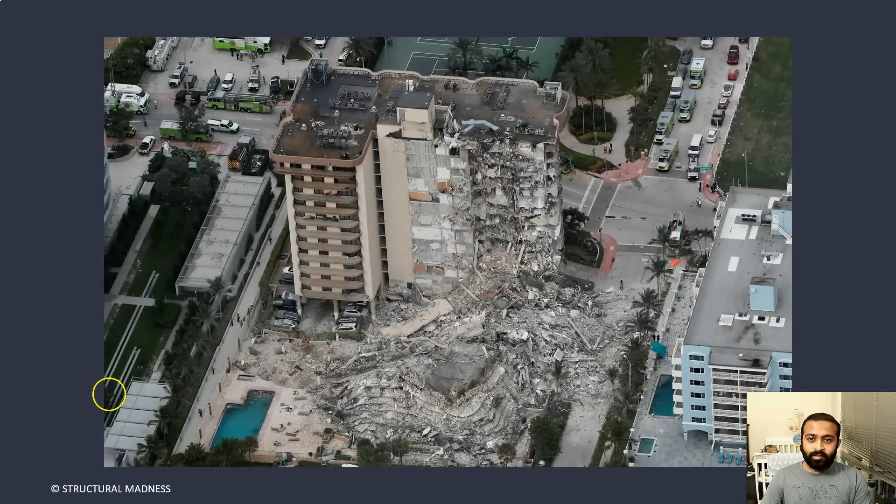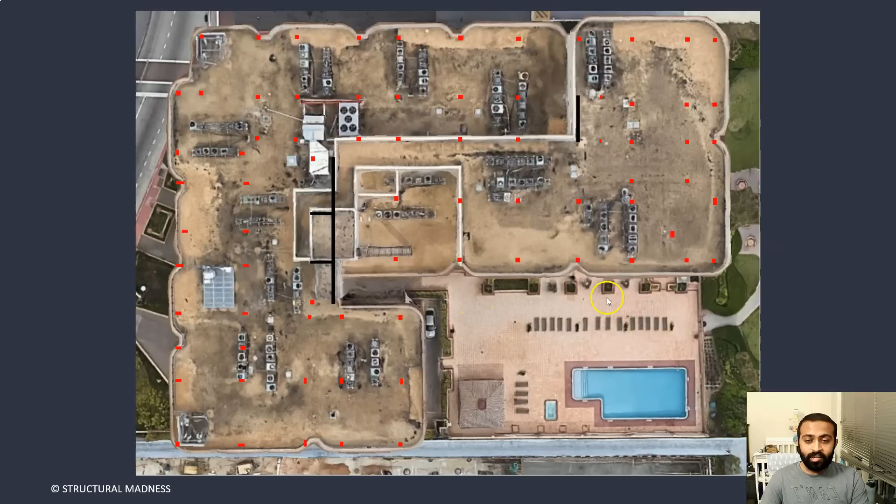The 12 stories of the building just pancaked on top of each other within a matter of 12 seconds. What we are going to look at today is some of the models of the pool deck that actually gave away first, and the overall layout and locations of the columns present in the building, and how it contributed to the global collapse of this particular structure.

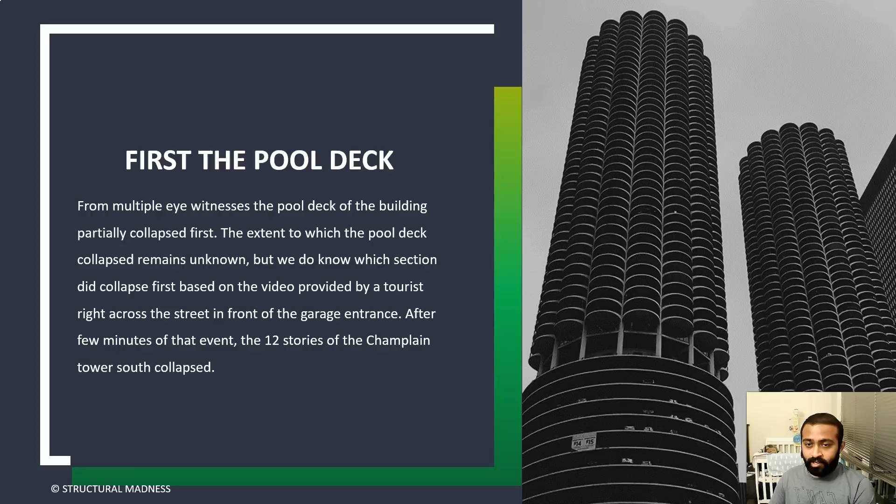From multiple sources, the testimonies of the survivors, as well as people who captured videos across the street of this building, it was quite evident that it was the pool deck that gave away first, and soon after, within a few minutes, the entire 12 stories of the Champlain Towers collapsed.

This is one snippet of the widely circulated video that shows the garage and what was happening at that particular instance in the building. This shows that there was debris behind certain columns in the garage, and there was water flowing and flooding the garage as well.

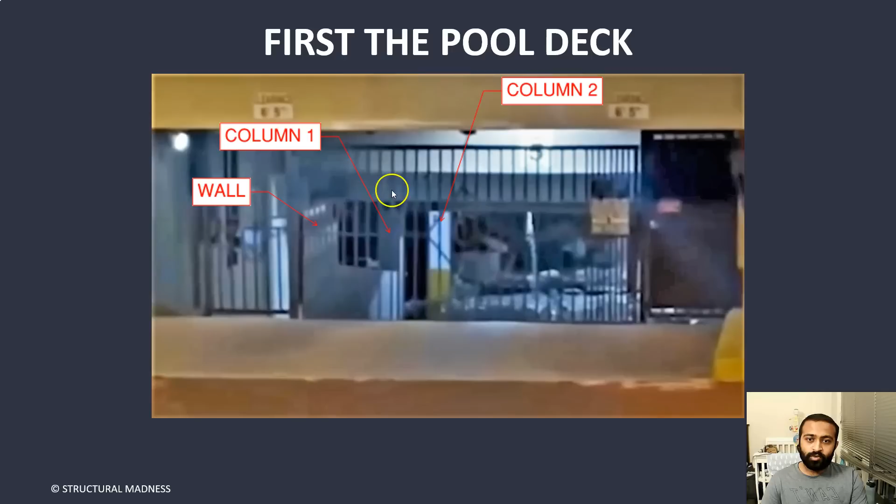What I've identified here are three structural elements that we can see at the moment. This is one of the structural walls, the northeast corner shear wall. There is one column right next to it, about 15 to 20 feet away, and then another column about another 20 feet away.

To get a better perspective on where the person was present while shooting this video, she was right in front of the parking garage entrance. If you understand this camera angle, you can see this is what was marked as the wall in the previous footage, and this is column 1 and column 2. These two columns are standing, so there was no collapse up until this location.

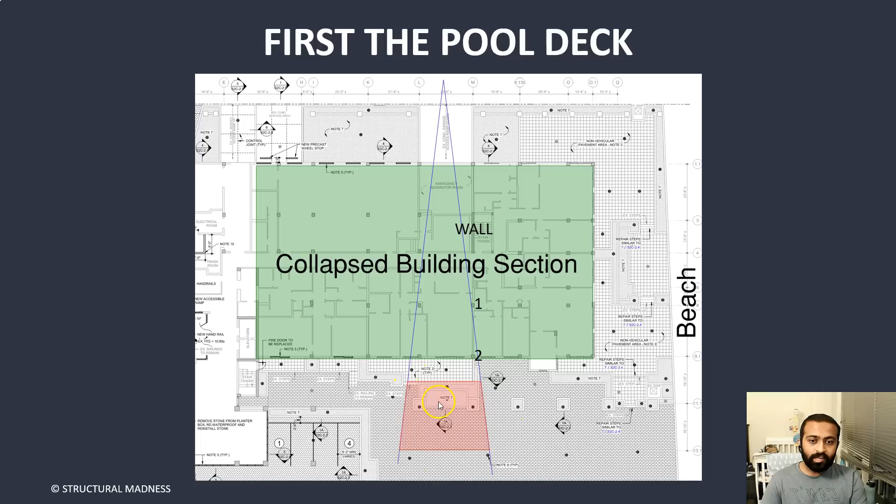This is the actual shadow of the tower above. So it is quite evident that when this particular video was shot, there was potentially no collapse along this column line, but all the debris we are seeing is actually present from beyond that particular column. That tells me something was going on here which led to the collapse of this particular zone of the pool deck slab.

So that caught my interest. Now what we'll first understand is once the pool deck collapsed, after a few minutes, how did the tower collapse?

You all have seen this video. The front face of the tower first gave away, followed by the back facade of the tower, and then after 5 to 7 seconds, the northeast portion of the tower collapsed. So what do we understand from this?

It is quite evident that first there was a local failure based on survivors' descriptions. It was like the pool deck gave away first, then after that the entire structure gave away. So why did the pool deck give away?

Based on my initial observations of the pictures as well as the structural drawings, and looking at Morabito's consultant report back in 2018, it was quite evident that there was lots of corrosion, which leads to loss of structural strength of the system. There was lack of drainage as well because there was nothing like a slope to drain that prevents water puddling. And then there was significant concrete damage because as soon as the rebars rust, it actually tries and spalls the concrete off because the rebar tries to expand as it's oxidized. On top of it, there are some changes in chemical properties of the concrete as well.

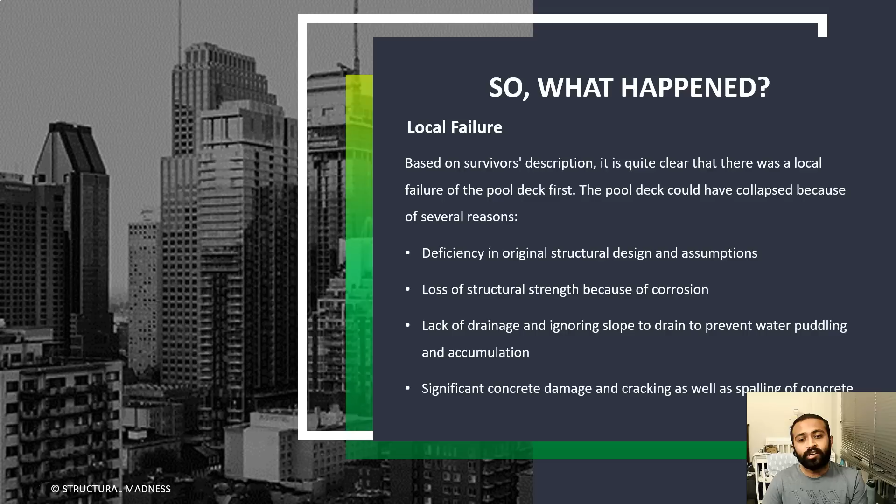And as soon as concrete cracks, it becomes weaker and weaker, right? On top of it, what I also noticed is there were a few locations on this pool deck where there was just an inherent deficiency in the original structural design and the assumptions thereof.

So these were the factors that I think did contribute. The factors that did not contribute were: it's not like the pool deck columns failed. The columns did have plenty of capacity. There was no evidence of seepage of seawater into the basement, and there was no significant differential settlement between the columns. This aspect of differential settlement is reported by Morabito Consultants in its unverified field survey report. So it doesn't seem like that had any role to play in this.

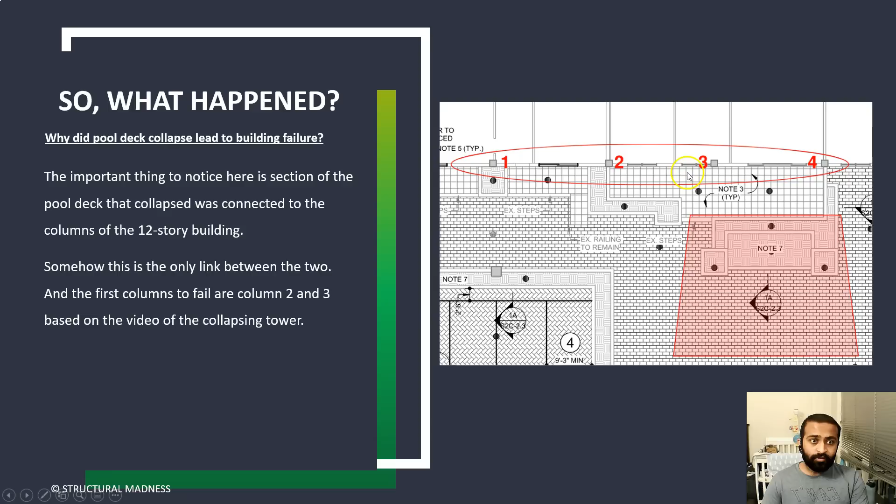So let's first look at what happened. Why did the collapse of the pool deck lead to the building failure? The only common key between the collapse of the pool deck and the building failure are the columns circled over here, columns 1, 2, 3, and 4. These were the common elements between the collapsed portion of the pool deck right there, as well as the columns that were supporting the tower. Apart from this, I couldn't find any link that was relating the two.

Why did our pool deck collapse? So this is where we will start answering all the whys, like why did this happen? Why did the pool deck give away in the middle of the night? As discussed previously, there were a few reasons why the pool deck collapsed.

One of the major reasons is definitely the rebar corrosion. And then there was also significant cracking. So as soon as I see significant cracking just under serviceable stages, that means your day-to-day building loads, which is like your floor slabs' weight itself without any additional load on it. For example, there's no one on the deck.

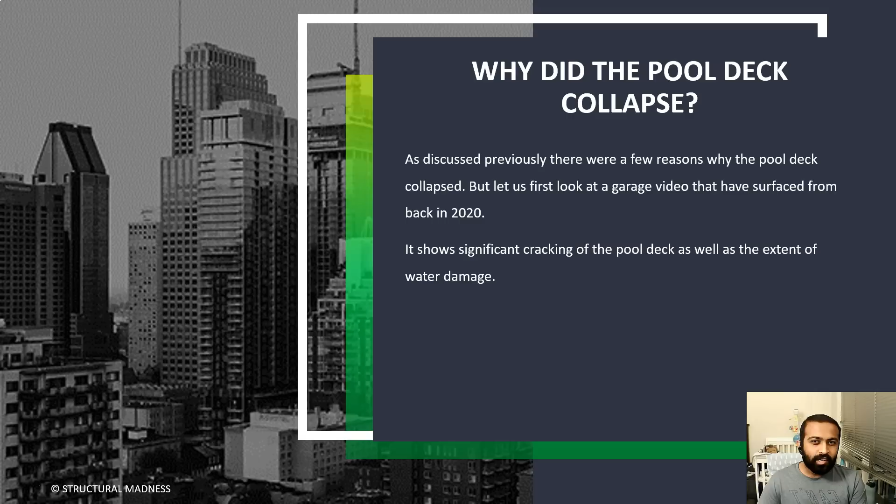There are no people, there is no car, there's nothing on the deck. It's just the deck that's supporting its own weight, along with the tiling and everything that's present, and the mechanical plumbing present underside of the slab. Just under those conditions, if a structural engineer sees significant cracking, then we start to question: was there enough rebar to begin with in this particular slab design or not?

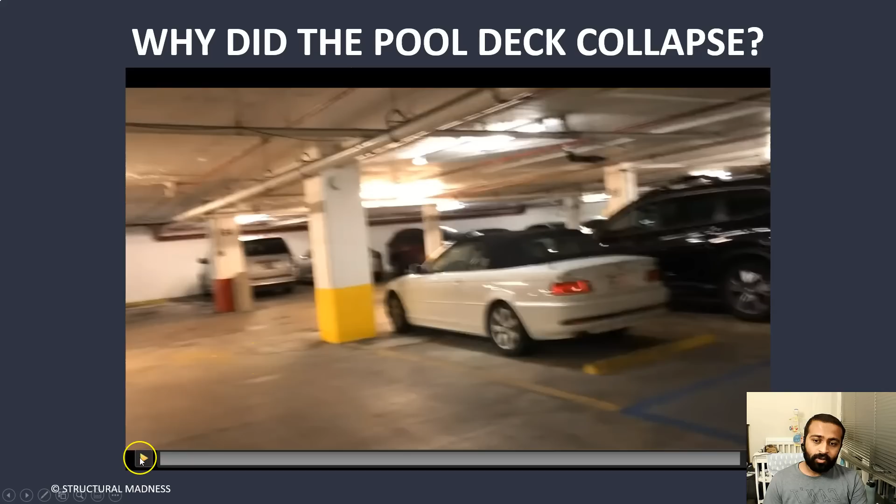And that's what I wanted to figure out. To get to that point, I first looked at one of the videos of the garage that was shot in July 2020 - that was like a year prior to today. You can see that the ceiling of this particular pool deck is actually showing lots and lots of signs of cracking and water damage.

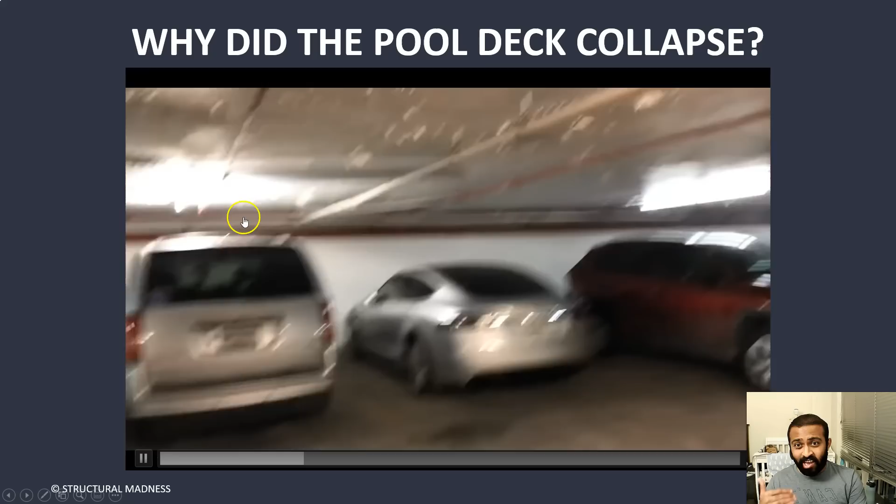Water was seeping literally everywhere underside of this deck. And when you see this kind of action happening in a building, you know there were two major issues. One was that there were no drains to kind of drain out the water that was accumulating on the floor above. Secondly, having that water seeping through your slab and spilling underside of the slab onto the basement floor below tells me that the concrete cracks were kind of significant, allowing the water to seep through its cross section and drop down into the slab below.

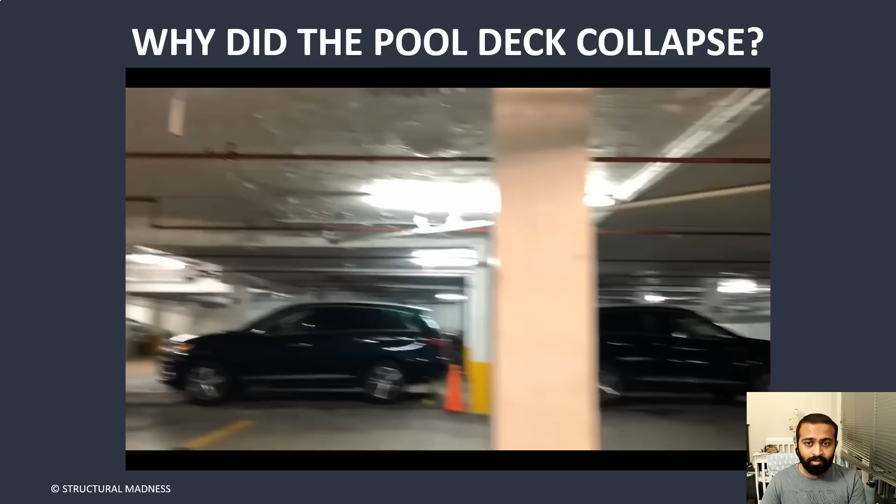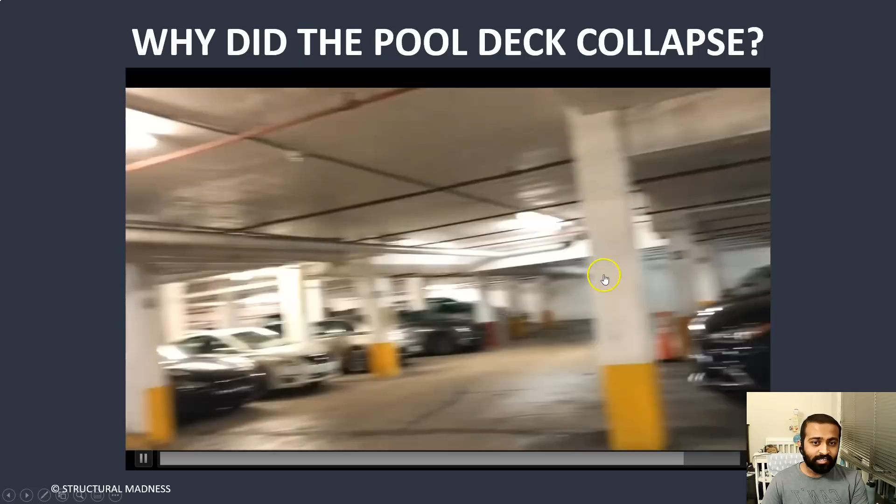And this is the portion that's most interesting for me, because it's right in front of this particular garage entrance - it's our second column right there. If I just go back a bit, that's our second column right there that was just visible in the video.

And beyond this column, everything was kind of just rubble. So we know something happened right there. What I'm showing over here is shot-by-shot footage of the person's perspective and where they were in terms of the entire building footprint, like the basement footprint.

As you can see, when you're looking in this direction, you're looking towards parking stall number 52 and 54. This is the perspective of the person, this is the camera angle. And then the person goes, circles around, and moves into this direction. I've just cut some clips in between because I didn't find them overly useful at the moment.

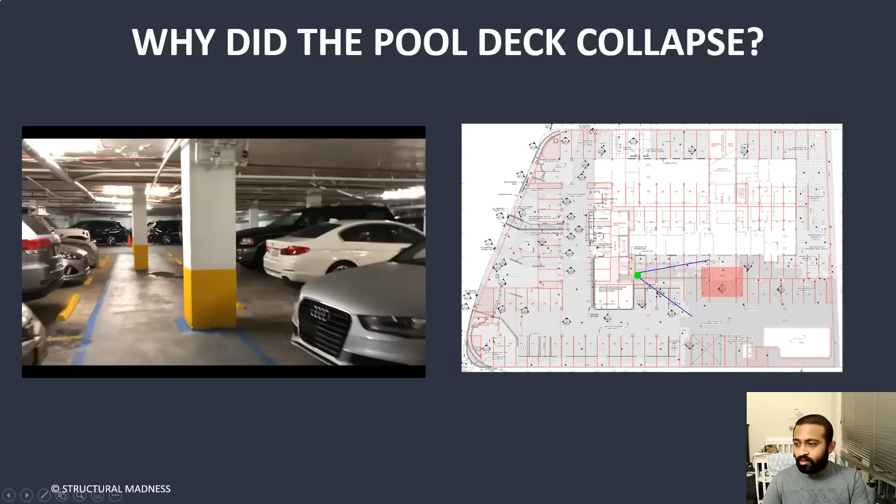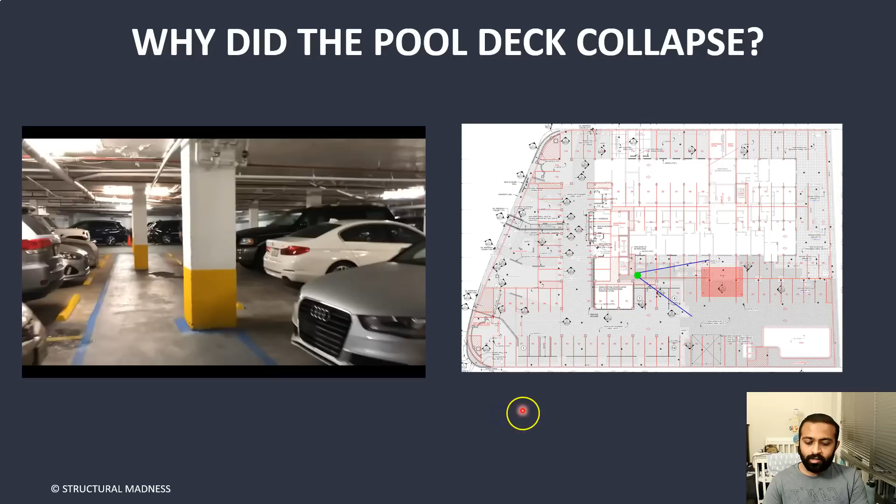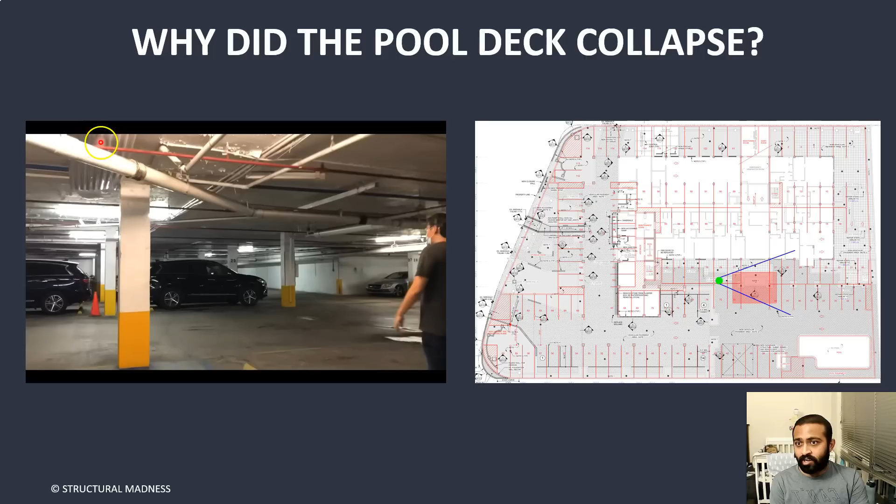But in these clips as well, you can see that there is some sort of water damage in this region. And if we move forward to the next slide, you see that there are some plastic corrugated sheets which are trying to divert the water from the cars below, meaning they were trying to reduce or eliminate the damage that the cars will face when the salty water falls on it. So that's why they provided this corrugated plastic sheets.

And this is what's very interesting. This is our column number 2 that we initially marked on the plan, which actually survived. This particular portion collapsed in the garage video that was shot by the person right across the street. What's interesting is this entire portion has been damaged by a lot of water seepage, while this portion is perfectly fine. You can see how smooth this is, but this is all damaged.

And what's surprising is right above this section, there is a planter wall, and you have soil fill and grass or trees or whatever they were growing at that time. That's all there. You know that typically these soils are saturated, and if the soil is saturated, it will have water in it. When the slab has some sort of minor or significant cracking, that water is going to seep through the slab, and you'll see its effects on the ceiling of the floor below. Correct? So keep this particular portion in mind.

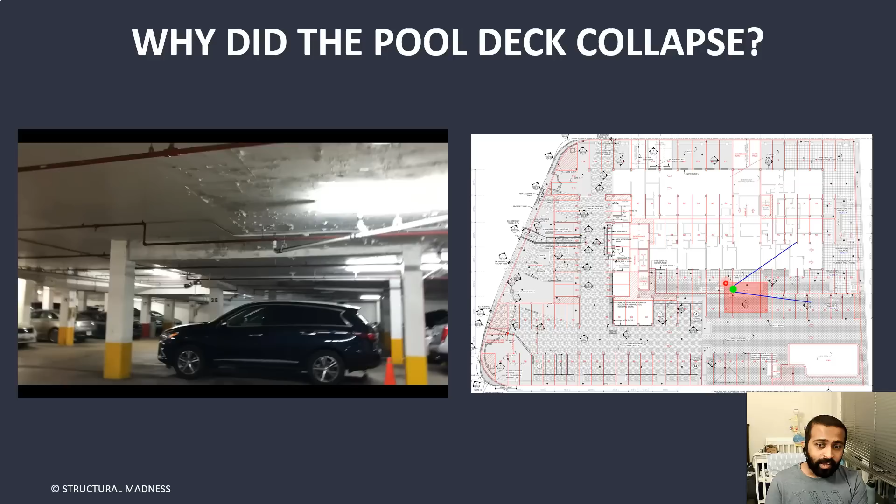Also mind you that this soil fill was about 18 inches deep per the original architect's drawing, so it's also heavy, not like a very light soil. Since it's saturated, it actually adds to the weight.

So again, going back to this, what does all this water penetration convey to a structural engineer? To answer that, it seems like the serviceability level, the level at which the pool deck was designed and reinforced, seems a little insufficient. And when I say this, I don't mean it's going to collapse immediately as soon as the loads are imposed on a concrete structure. No, concrete is great at redistributing loads. It's great at deforming a bit and transferring the loads in some other fashion. That's why you didn't see this collapse for the past 40 years approximately.

And it just happened overnight. And when it happens overnight, that tells me it was a brittle collapse, not a ductile collapse. I'll get to that point later on in a few minutes.

So the water penetration did damage a lot of steel and concrete in the slab for sure. You just don't usually see this kind of damage in basements. It's very rare, specifically for practicing engineers like me living on the West Coast. And when this water penetration becomes significant, it damages the concrete as it passes along the cracks of the concrete, and along with this, it also leads to rebar corrosion.

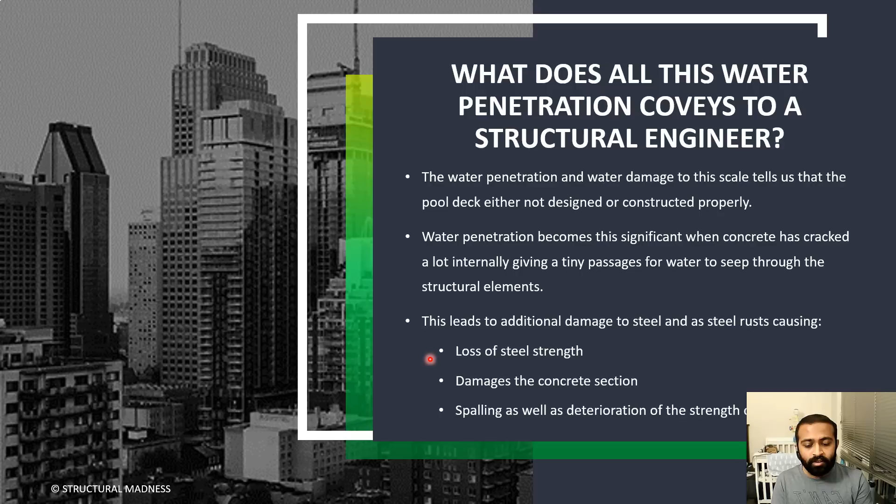If you ever pay attention to corroded iron or steel, you will see that a portion of the steel actually falls off. So what that also tells you is the area of cross section of the steel reinforcement has also reduced, which weakens the steel further. It damages the concrete around it because it oxidizes everything around it. And when the rebar actually corrodes, it tries to expand a bit, which leads to some additional cracking in the concrete.

So we should understand how I came to this conclusion. Structural engineers design buildings for two different conditions. One is your short burst sprint, the ultimate strength the structure should have - that's your Usain Bolt condition. The other is your marathon runner condition, the serviceability, daily loads like your floor slab, your furniture, without any guests in your house or apartment. These are the serviceability conditions - that's your Eliud Kipchoge condition.

If I compare these two conditions: one is like a large pool party with hundreds of people gathering on top of the pool - we don't want the pool to fail, or else the pool deck will be useless if you can't have a party. The other is your Kipchoge condition, where you don't have a lot of people, but the structure sees some daily loads.

And what that daily load does is it actually creates long-term stresses on the system. Along with those long-term stresses, there's something called creep of the cross section, and with the creep you get some deflections, and with deflections you also get some minor concrete cracking.

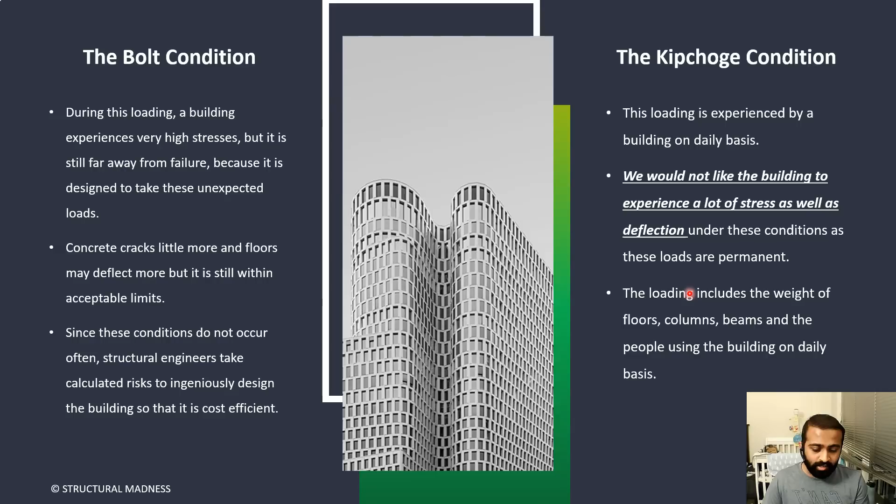When you look at the serviceable conditions, this is where loads are experienced by the building on a daily basis. What we would like to see is the building experience a lot less stresses and a lot less deflections under these conditions, as the loads are permanent. These kinds of loadings are your daily loadings, and they include the structure's self-weight and some additional weight that you as an occupant impose on the structural system.

When we design the building, the magnitude or quantity of steel we provide is often governed by this extreme loading condition. What this ensures is that the structure doesn't collapse when these kinds of loading conditions do occur.

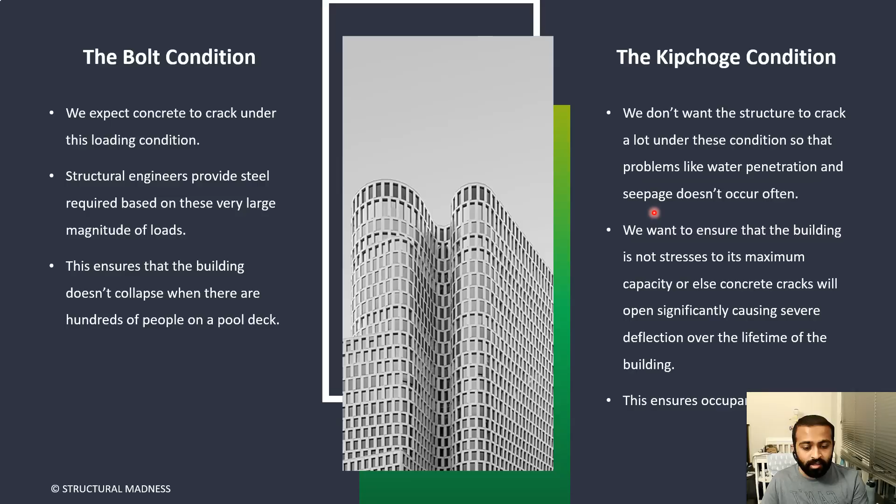Under the serviceable limits, we don't want a lot of concrete cracking or water penetration issues, because we want to ensure occupant comfort. Occupant comfort only arrives when you have lower maintenance on the building. To ensure lower magnitude of cracking, we also need to ensure that these sections or structural elements themselves see lower stresses.

So what was happening on Champlain Towers? It was as if our desired performance for the pool deck specifically should have low stress, less deflection, less cracking, less water penetration issue, less demands on the structural steel - and this holistically ensures occupant comfort. But what was actually happening?

The structure was under a lot of stress under these everyday loads everywhere. There was significant water penetration issue, which causes occupant discomfort, and this actually leads to constantly near 100% utilization of the structural steel that was present.

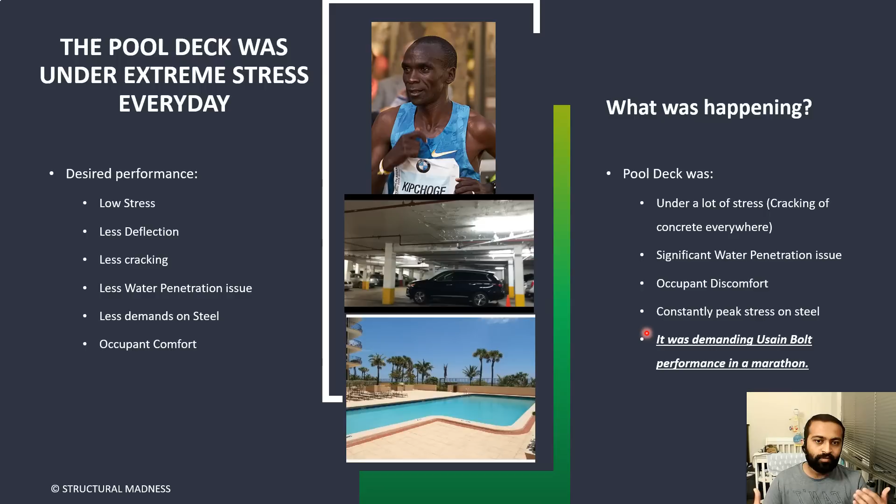It was like demanding a marathon run from Usain Bolt - that's impossible, no person can run that fast for that long. Same thing goes for structures. They cannot just take the maximum magnitude of loads based on their capacities every day. You can't ask a baby to run a marathon.

It's that simple. So how did I assume that it was under-designed to some degree? Not everywhere, but there were a few spot locations that were highlighted when I was looking through the structural drawings.

So what I did is I created a pool deck slab model with the grade of concrete as 4000 psi, as specified on the structural drawings, as well as looked at the member depths - that's a 9.5 inch deck right there. And I applied all the superimposed loads.

What are superimposed loads? For example, you had about 4 inches of extra concrete material, which is your additional waterproofing. You have some additional built up concrete on it. And then you also have your tiling over here, made of clay or some other material, which is also significantly heavy.

Once I applied just those superimposed loads, I also applied a very minor magnitude of live load, about 10 pounds per square foot. Typically, we design apartments for about 40 pounds per square foot, and spots like pool decks are designed for 100 pounds per square foot of live load. That means a lot of people are going to be there, the density of the crowd is going to be huge.

But in this particular condition, I just used 10 psf of live load on top, which accounts for some accidental stresses that are hard to understand just by looking at the drawings and even the survey reports.

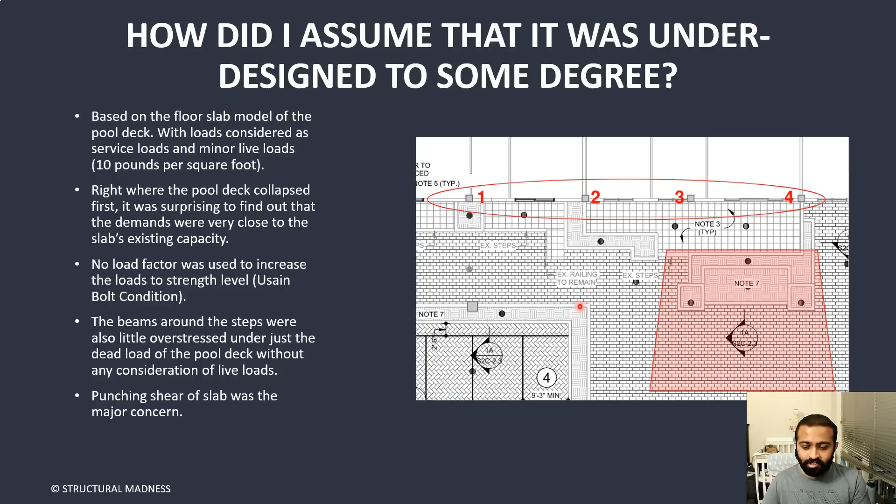And then, the beams present underneath here were highly stressed. On top of that, I also noticed there was a punching shear issue around these columns because of this heavier soil loading, which tells me the structure itself was seeing very high stresses, even though there was hardly anyone on the pool deck.

So this was my slab model that I quickly created to get a rough idea of what the stresses were. And again, as you see, my demands are very close to the design capacities. These are not the actual expected capacities, but we call these design capacities, which are a little bit lower than actual expected capacities.

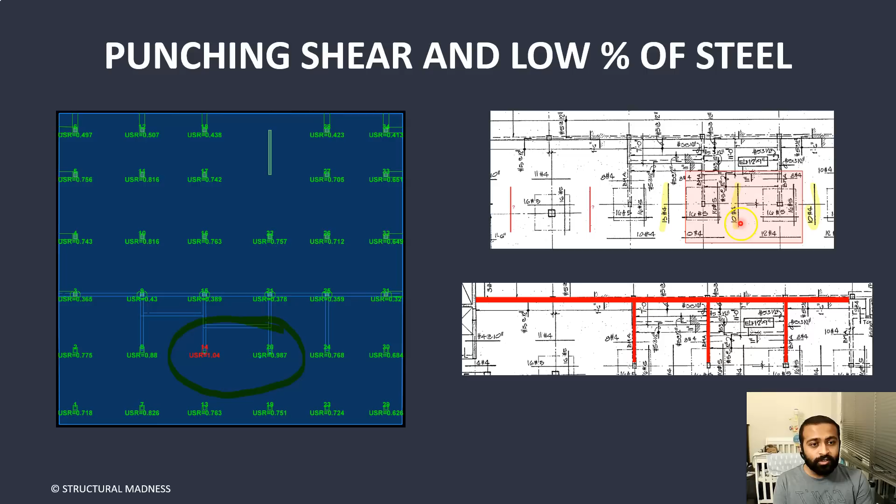On top of this, I did notice the beams highlighted in red were also overstressed, and the structural steel that was provided was also barely enough to handle these serviceable conditions, that's your day-to-day loading condition.

This particular image actually caught my eye. What was interesting is I saw there were just two reinforcement bars, two number 5 reinforcement, coming out of the column, which is a bit unusual because typically there should be 4 or 5 reinforcement per the structural drawings going through the column. When you have very low reinforcement at the slab column joint, what happens is your capacity for the slab's punching shear actually reduces.

And it reduces far below what the code specifies as your building punching shear capacity limit. So, for example, this is my 1.0 demand to capacity ratio. This is the actual capacity of the section under any particular load. The capacity is just based on geometry, it has nothing to do with the loading conditions. And demands actually come from loading.

And loading is what? Your self weight of the slab, your additional tiling, your mechanical stuff, your furniture, etcetera, etcetera, etcetera. And we reduce that capacity by a factor, we call it a material safety factor, which accounts for some material uncertainties.

And even after that reduction, when you have this low reinforcement ratio, and when you also have the impacts of corrosion because of concrete cracking and water damage, your capacity keeps going further and further down. And this is a big concern now because since the building was built in the 1980s, there was no punching shear reinforcement that can handle additional punching shear stresses.

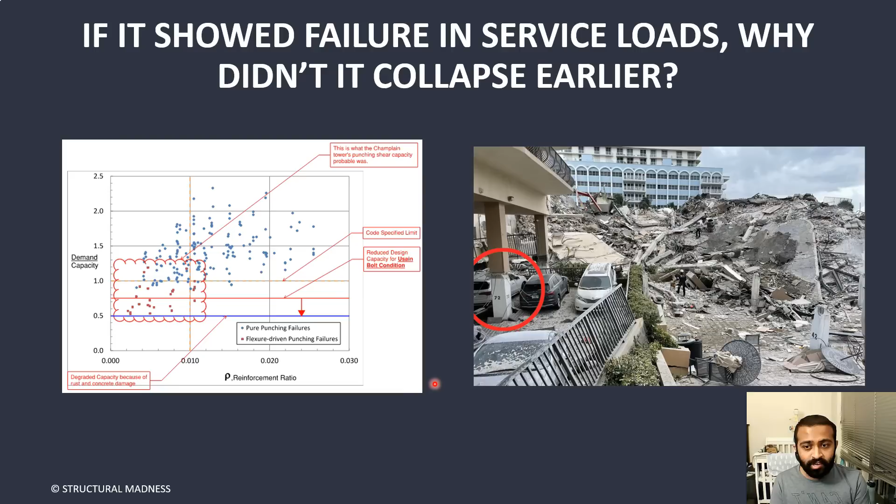So whenever, if and ever a time comes that your last aggregate interlock or your last line of defense gives away, it'll be like a sudden collapse of this pool deck. This is what punching shear kind of looks like - your top reinforcement goes over the column, and there are some minor cracking which are expected because concrete cannot take tension, right? It cannot take this pulling force. That's why we provide steel, or else we wouldn't provide steel.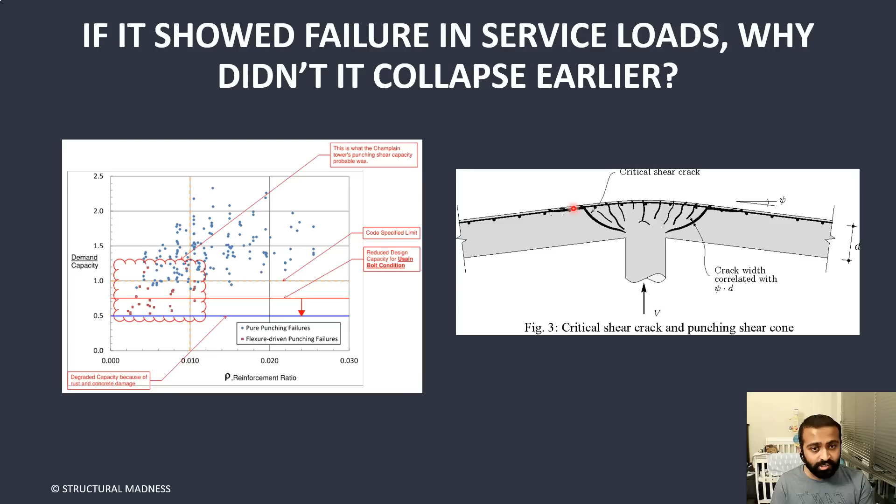Based on the magnitude of steel, the percentage of steel, or the number of bars that you are providing, the lesser the number of bars, the wider your cracks will be. And the wider your cracks will be, the lower your punching resistance will be. Because for punching resistance, it is essential to have less cracking so that aggregate interlock of concrete holds in place and resists your punching shear forces. But when this rebar reduces, your crack actually widens up significantly, causing lower capacity of punching shear.

So this is how a material could potentially degrade with significant magnitude of damages. But it was not just the degradation of material, as we found out. It was also the section was under designed, like just under your serviceable loads, just under the self weight of the materials. The demand to capacity ratio of this section was almost close to 1.0. So that's what this degraded line is showing.

And what it's showing is typically people expect, looking by drawings, like, oh, this is what my expected line should be. So my structure should be good, right? But no, that's not what it is. Your members itself were a bit under designed, and that will lead to a premature failure than what anyone would expect. That's the key here.

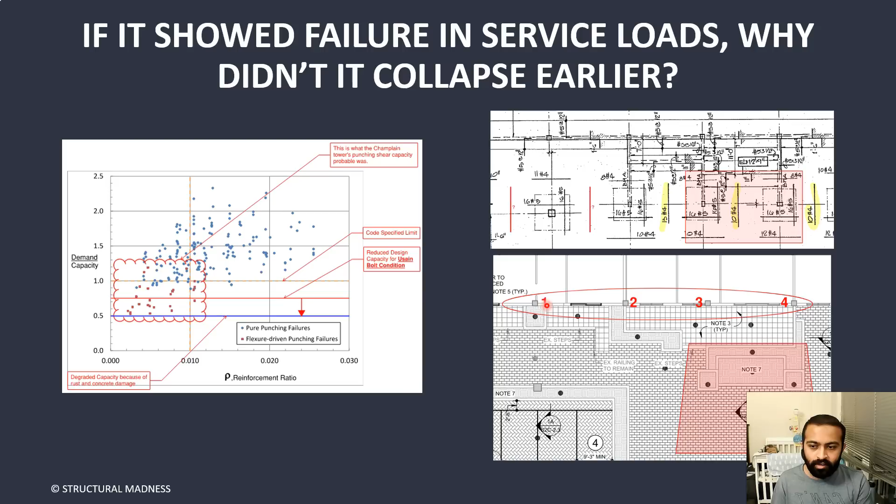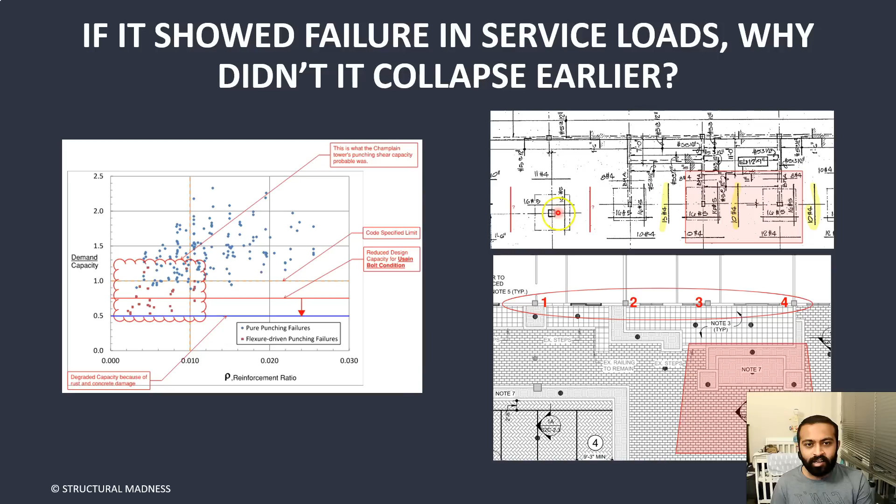And on top of it, maybe this is just a mistake they may have caught while constructing the building, but there were no top reinforcement in between the columns like you usually see on the drawings. There was just no reinforcement called out. So that's a little bit surprising to me. But if this were the issue, then we would have seen some additional damages prior to this. So I am kind of questioning that. I may be wrong over there, and that's why I've put a question mark, like may or may not be provided top reinforcement right there.

And then on top of it, another area that caught my attention was a few columns right here, right next to the pool deck. And why was that interesting for me? It was mainly interesting because the slab span over here is like 30 feet. Ask any structural engineer today, what should be the slab thickness for a 30-foot span when you have a heavier loading like pool deck? And I can confidently say that their answer will be like 12 inches thick slab if it's a mild slab, if there is no post tensioning in it.

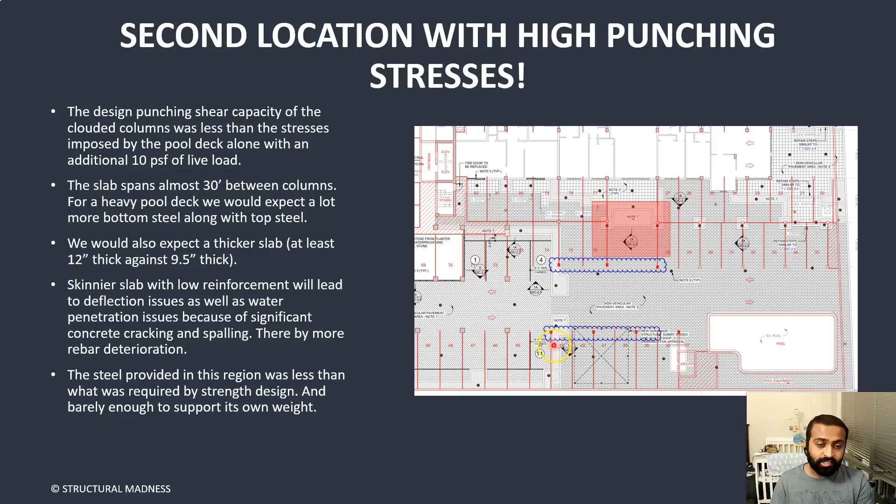And that's why it was like, why do they have like a 9.5 inch thick slab? Because that would lead to some deflection issues. That would also tell me that there will be more punching shear issues over here because the loading is more on each column as your slab is trying to span more, right? And that's exactly what happened.

When I actually ran the analysis model, what I saw was there was this large band of higher concrete deflection just under your dead load and your material load. This is not even including any sort of live load, right? So this tells me that the structure was deflecting a whole lot. And again, that's why you have those water penetration issues everywhere under garage, right? On the underside of the pool deck slab.

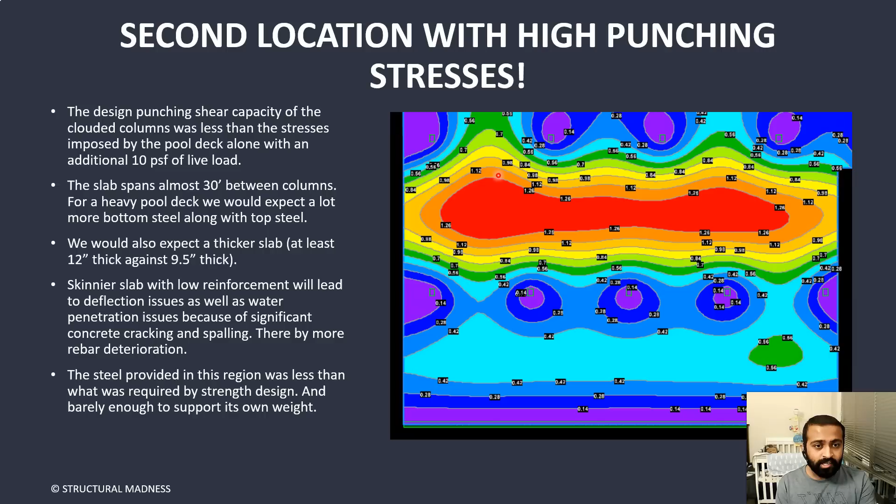And on top of it, typically, when you have this large span on a pool deck slab, we would expect a little bit higher reinforcement, and that's exactly what the software gave me. It's like the reinforcement that was provided was barely enough to handle or support its own weight. Again, the slab is not going to collapse immediately. This is like your tension reinforcement.

So what happens is, as soon as the structure sees a little bit higher loads, your rebar kind of stretches, not exactly like a rubber band, but you can exaggerate it like that. So it stretches itself like a rubber band, and your crack width kind of increases. So your crack opens up and you have more water penetration issues.

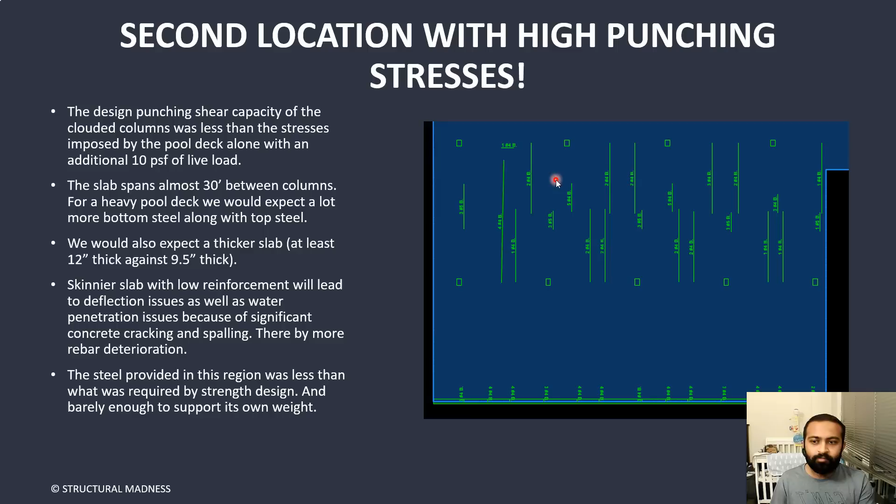You have a little bit of additional deflection on top of it, but it's not going to fail immediately. This was also a severe concern in my mind, and it showed there would be punching shear issues, and that was the case. I'd expect 33% additional steel in such a longer span, but there was no additional bottom steel called out on plan.

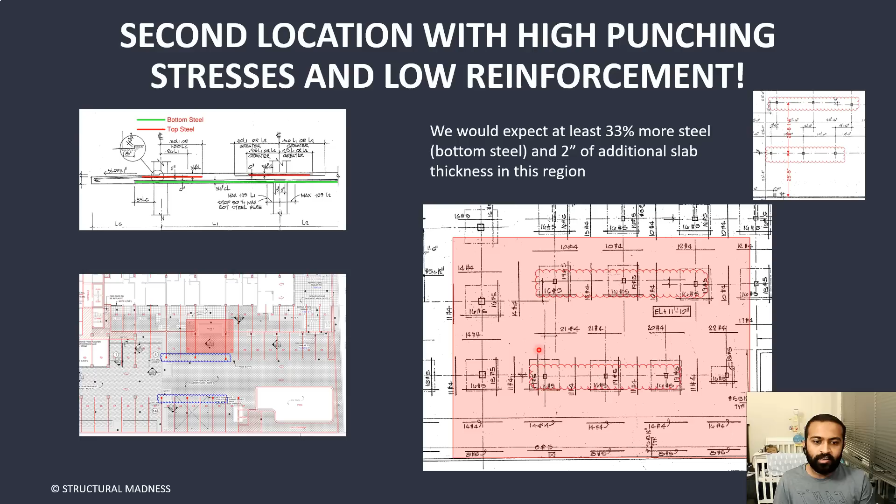Even the top steel was barely enough to handle its own weight, so I don't know if there was a design change later in the project that led to this issue. Now think about how there were just two rebar going through the column - if you apply something similar here, there's no surprise. The pool deck could have collapsed earlier or later depending on the magnitude of damage from water penetration.

Was punching shear the only problem? I'd say no, because as I showed you, additional flexural reinforcement was required than what was provided. As soon as you have lower flexural reinforcement, your slab deflects more. But concrete reinforced with steel is really good at redistributing its loads, so that's what could have happened - concrete was redistributing the loads, but it was also under a lot of stress constantly every day.

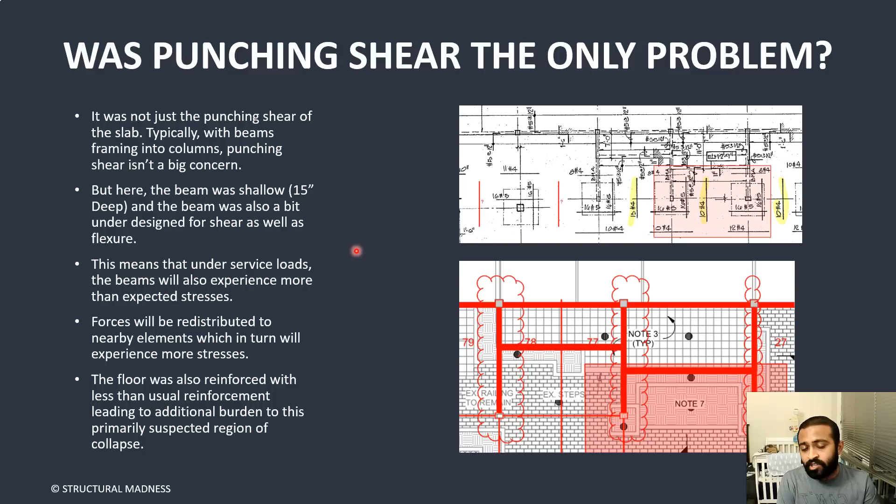It was just waiting to collapse as soon as the last failure mechanism to resist these loads gave away. So this is your concrete.

You can imagine it like a tug of war. If one person on your team isn't pulling efficiently, everyone else is still trying hard. But because one person isn't working hard enough, after some time you get fatigued and may just give away. You're like, I cannot take it anymore - the other team is giving 100% while I'm only giving 75%. That potentially does happen here.

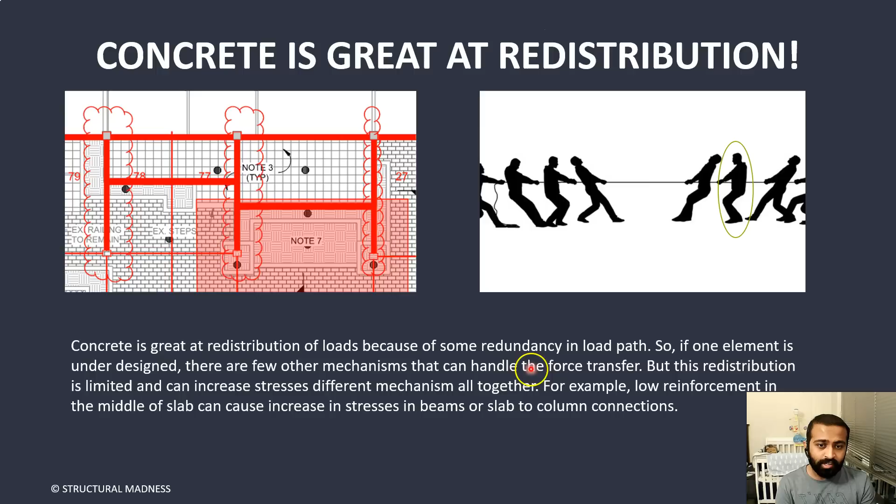So what was the scale of this pool that collapsed prior to the building collapse? I personally think it was not just the highlighted red section we discussed before that collapsed. Based on the analysis, I think this entire section did collapse first - it was not just local failure.

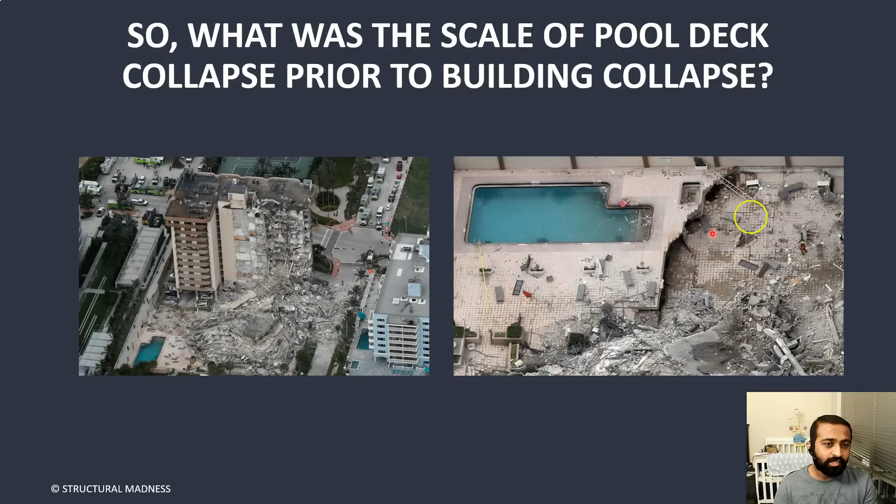Why do I confidently say that? Again, low punching shear capacity - you can see the columns have punched right through the slab, like punching through paper with your pen. And there's no additional debris here, so it's not that debris caused this additional collapse of the pool deck. No, there's no way - it's just that your pool deck gave away first.

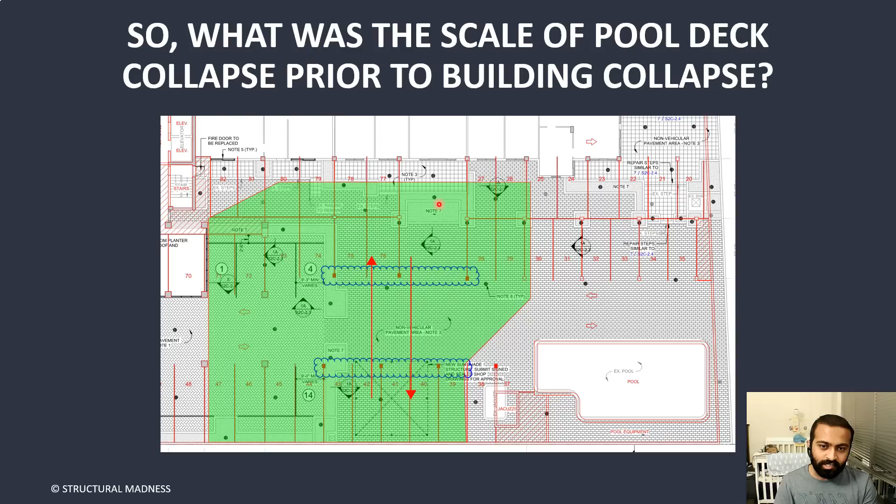Why did it do this? Notice this pool wall was almost a story tall, so it had a lot of stiffness. This column was also very close to the pool deck, along with the jacuzzi walls here, so this slab couldn't just shear off right there - it had a lot of shear capacity. That's why it did this jog and came over here and then collapsed in this entire zone. This was the first collapse in the entire sequence - it's fairly accurate to say this could have happened.

Now let's focus on what triggered the tower collapse. This was the collapsed pool deck. This is a step beam, and this step beam was more or less detailed as a step rather than a beam, so there was some lack of reinforcement.

If the pool deck gave away, the existing reinforcement in that step beam was not sufficient to handle additional stresses. So this is what I'm showing - this is your collapsed pool deck, and it causes additional stresses onto these step beam elements, which were just 12 inches wide, and the detailing was not clear enough.

Where is your top rebar here? I'm fairly sure - I shouldn't say 100% sure, but fairly sure - that they would have hooked the bars like this, because they're showing it on the plan right there.

A hooked top reinforcement, number 5 at 12 inches on center. So even if they have missed on detail on plans, a contractor can catch it and provide it. It's fairly typical to miss a few things here or there, but that's why during construction, contractors ask us questions like, what's our intent over here?

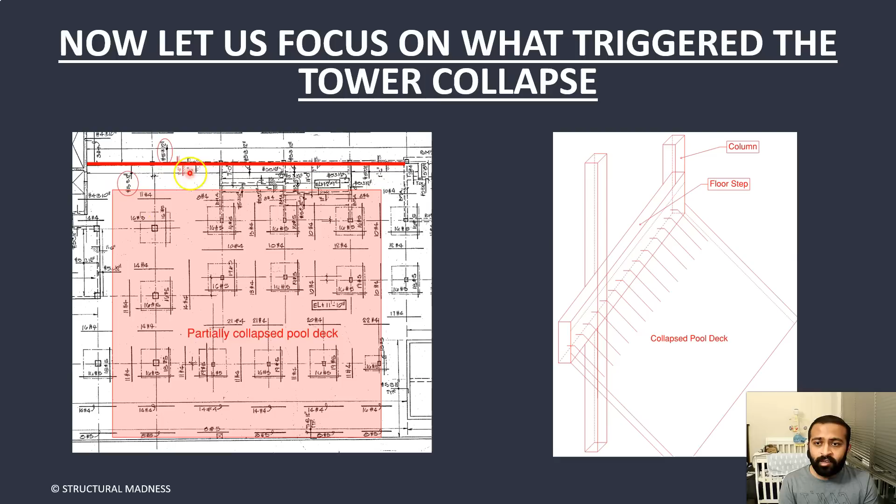So this reinforcement must be there, but that's the reinforcement that's holding it and transferring loads to the beam over here. And this beam doesn't have a ton of reinforcing, it's just two number 5 flimsy tops, and that's it. There's nothing else. That surprised me, because just based on the collapse section and how much weight it will impose onto this beam, just by the dead load of the slab itself, I require like 3 or 4 number 5s at the column support, while the drawings are calling out just 2 number 5s, and there's nowhere else that they have specified any beam reinforcement.

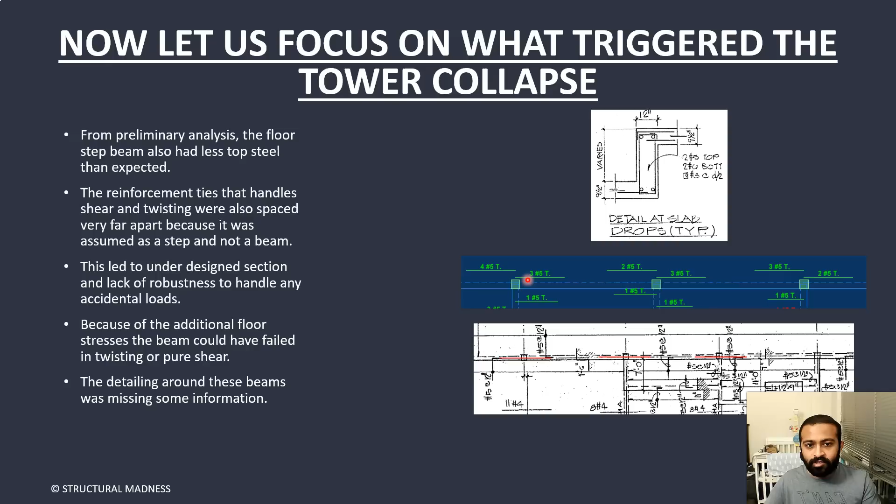And on top of it, the shear demands on the beams also increase. So what I do think could have happened is after a few moments of the full pool deck collapse, this particular step beam could have given away. And as soon as it gives away, your columns are free, there is nothing restraining the column from any sideways movement.

It was kind of interesting too, I'm not blaming that it was gym, that's presented on architectural drawings from the 1980s, that could have led to some additional stresses. I'm not 100% sure, but I was just reviewing drawings, and this is what I was kind of finding out.

And I haven't even accounted for this additional gym loading and its equipment, which actually adds quite a bit. Since that's not included, I can more or less confidently say that without inclusion of this gym's additional load, the beam was already on the verge of failure. So if these additional loads were present, it could very well be that these beams would have failed first. And if we look at the video footage of the collapsed towers, these are the columns that actually gave away first. That tells me that these columns failed soon after the pool deck collapsed and this particular beam collapsed. Why would the column fail?

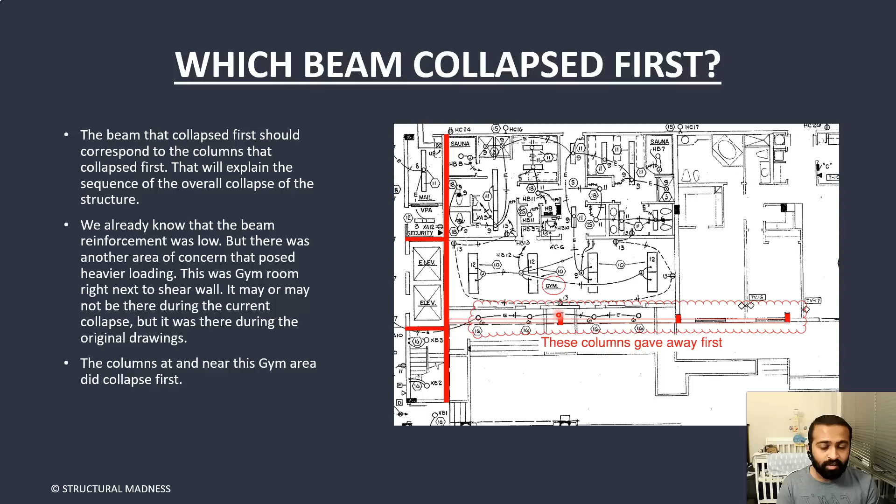What's interesting is the columns that were present here were just 16 inches by 16 inches, supporting 12 stories. That is too skinny. When you are supporting that many stories with a heavy pool deck, I would expect 20 by 20 or 24 by 24 columns on the perimeter, specifically on the perimeter because they are on the exterior portion of the slab and more prone to weathering effects. And because they are not at the center, they also see additional stresses because of punching shear and unbalanced moments coming from the slab into the column.

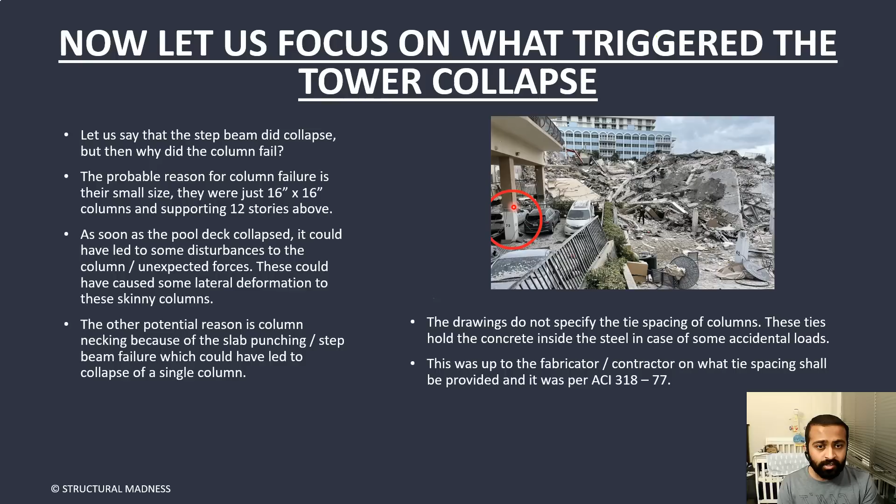So what could have happened is as soon as the beam and the slab gave away, there must be some sort of necking that formed around those columns, because your slab is going to pull out some concrete around it. And when that happens, your column's cross-sectional area reduces further, and there's something called column buckling. If you remember Charlie Chaplin as the character with his stick, you would see this kind of buckled shape.

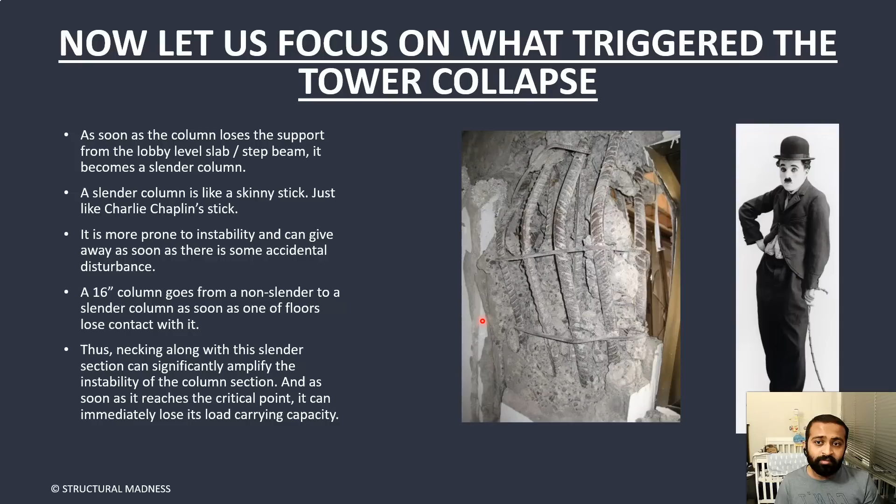Now the stick doesn't break because it's very ductile, it's like taking your steel reinforcement and stretching it out further and further. Steel can stretch, but concrete cannot, concrete is very, very brittle. So as soon as it sees some sort of deformation like this, it could potentially give away, specifically with some sort of necking that was happening right at the L1 pool deck and column interface. I'm not 100% sure about this, but this could be one of the potential reasons behind the failure of the columns.

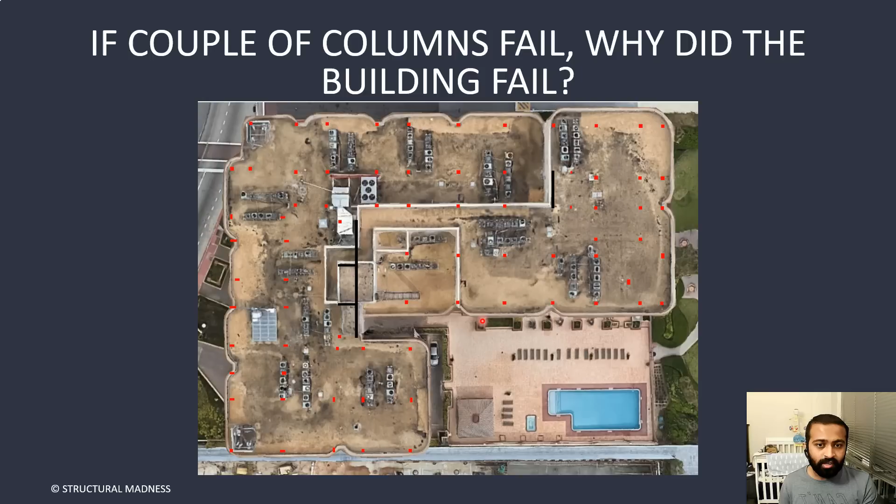So if a couple of columns fail, why did the entire building fail? If I take these three columns out, the slab tries to hang with the support of the neighboring or surrounding steel, and then you have columns around it supporting the slabs over here.

But what's interesting is the top 3 or 4 stories of this building had lower strength concrete for the floor slab. For the pool deck, for example, it was 4,000 psi, but on the roof on level 8 and above, it was just 3,000 psi, which means 14% lower punching shear capacity.

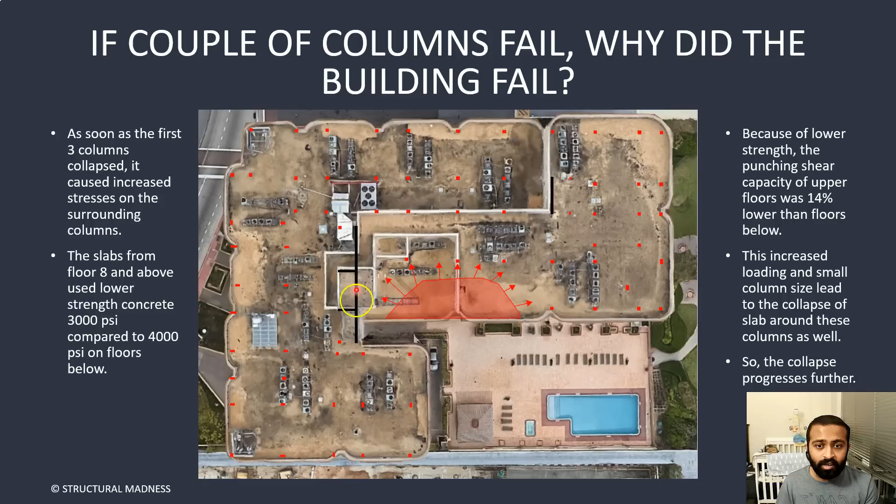On top of it, these columns will face additional stresses because this highlighted portion of the slab is trying to hang off of the other sections of the slab. As soon as stresses increase with a lower punching shear capacity, that's when these columns give away, and the collapse keeps triggering further into the building footprint.

But then what's interesting is you have a giant shear wall over here and here. These shear walls are designed for significant wind and seismic loads. If the building is on the West Coast, they'll be designed for seismic loads, but since this was in Florida, they'll be designed for very high category hurricanes.

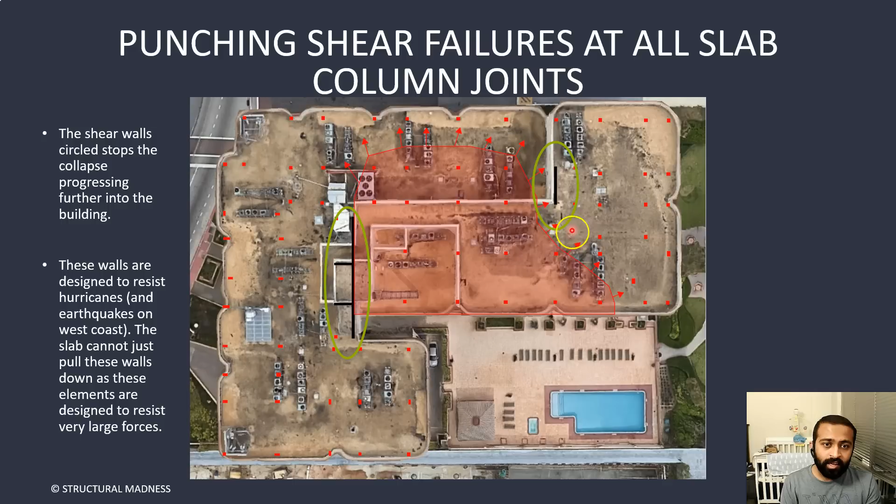So that's where these shear walls won't easily give away, collapsing just because of some thrust imposed by these accidental slabs collapsing at this instant. That's why the slab just literally sheared off right there, and this entire building was saved, and the collapse didn't even progress further. Something similar happened over here momentarily.

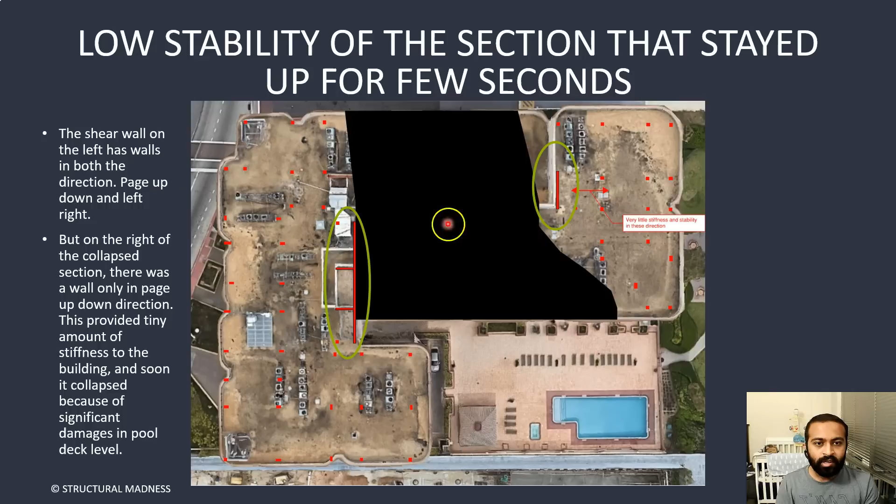This entire section gave away. This portion of the building actually stood up for 7 to 8 seconds, I think. Then you'd notice you have shear walls in this particular direction, that's your page up-down. There is no shear wall in the page left-right direction. So slowly, because of instabilities and damages in floors below, the columns as well as this 12-inch thick wall just gave away because it didn't have enough stability in that direction.

So you can see that it's standing and then it actually caved in this way. And when you look from the top, that portion never came down - it actually went towards the inside of the building. So this is its footprint right there. If I take the top line, it actually caved in this way. That's why you see these steps over here.

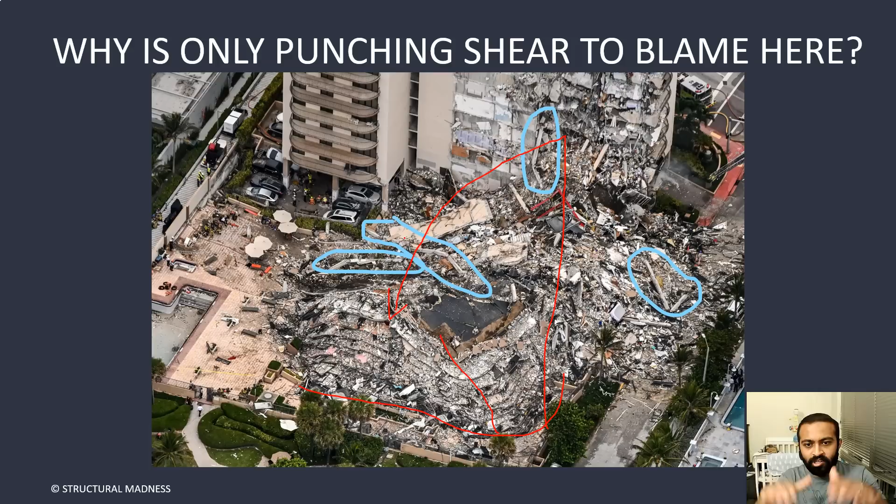Why am I confident that it was the punching failure of the slab? Look at all these columns - they are like straight chains with literally no damage. That just quickly tells me that the slabs were punched, punched, punched, punched, and then columns were just going down like that because there's no slab supporting the column anymore.

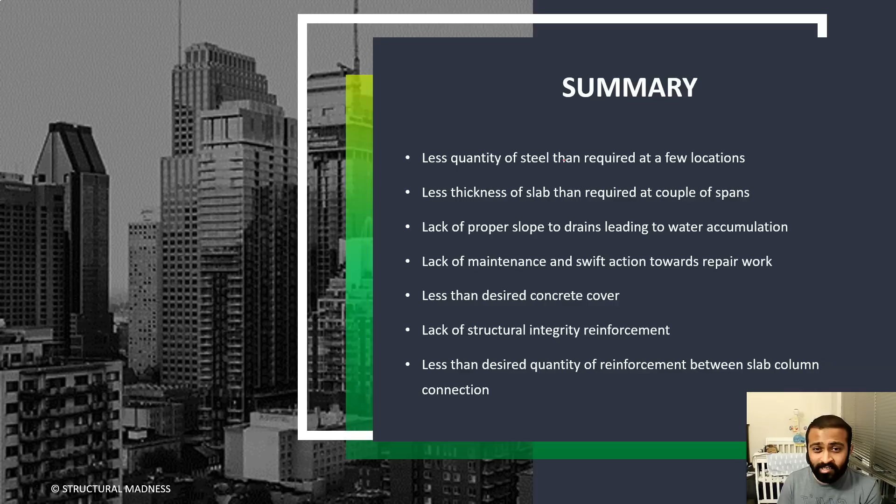To summarize this entire discussion: the pool deck started this collapse chain - it's quite obvious. The pool deck did collapse because of less quantity of steel than required, lesser thickness of slab than what we'd typically expect, lack of proper slope to drains so you can drain water and prevent damage on concrete, and there was also lack of maintenance in this case.

There was also less than desired concrete cover - just 3/4 inch concrete cover in these extreme environments, while I would say we need somewhere between an inch or inch and a quarter cover in such locations. There was also lack of structural integrity reinforcement, introduced in later provisions of the code, somewhere around the 1990s. This building was built prior to that.

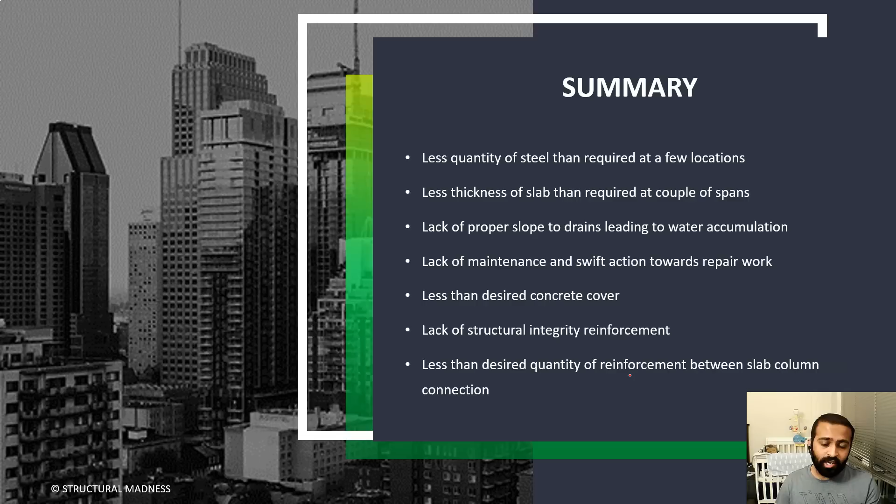And then less than desired quantity of reinforcement between slab and column connection. That was evident from after-collapse pictures, so that must have happened during construction.

With this, I would like to conclude my discussion today. I hope this helped you in getting some insights behind the collapse of Champlain Towers. Again, these are just my initial observations - it could very well be the site conditions or the reinforcing at the site during construction may have changed or added based on some of the findings later on. I'm unsure, and we will find it out when NIST actually concludes their investigation. But so far, as a structural engineer, I do see these as major concerns that could have contributed to the collapse of Champlain Towers. Thank you, and I will see you next time in completely separate discussions.